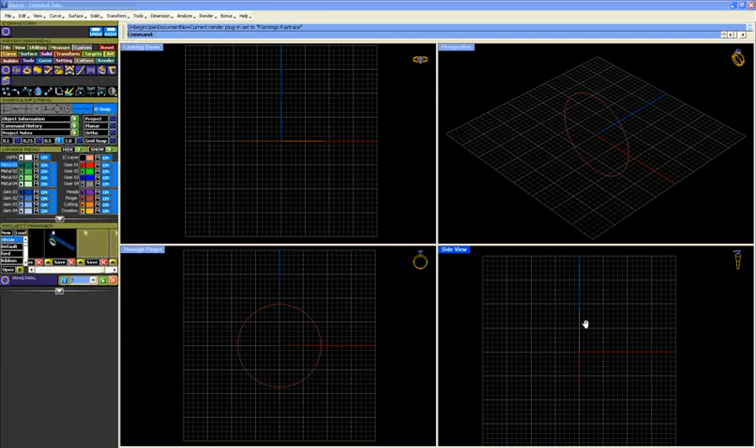I'm going to create my own profile for this, so let's go ahead and do that real quick. I'm going to go to Curve, Arc Direction. This is going to be a comfort fit, and I'm going to make a profile about like so.

Let's put that on a different layer, and then we're going to move from the midpoint to the mid of the circle. So there's that.

I'm also going to have a rounded lip here, and then a domed top to the ring as well. So let's go ahead, and I'm going to go away from this just a little bit and come up, and I'm going to look at the angle of this curve and kind of match my angle to that as close as I can get.

And let's go ahead and use blend from here to here. Okay, that's a little off, so let's move it down. And I always do this just so that there's no hard edge there.

And now let's go ahead and do another dome out like so. And I'm going to move this up out of the way, and I'm going to go ahead and mirror this to the other side. And let's join that up.

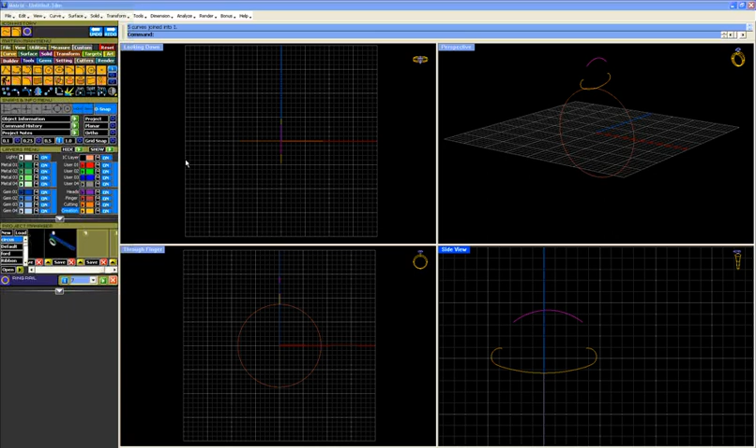And now I'm going to go ahead and move this to the center and then up. And let's 1D scale that out a little bit. The reason I'm not making that match is because to get a neater edge there, I want to use blend once again.

And let's go blend from here to here and from here to here. Now this is going to be one profile, and this one is going to be another profile.

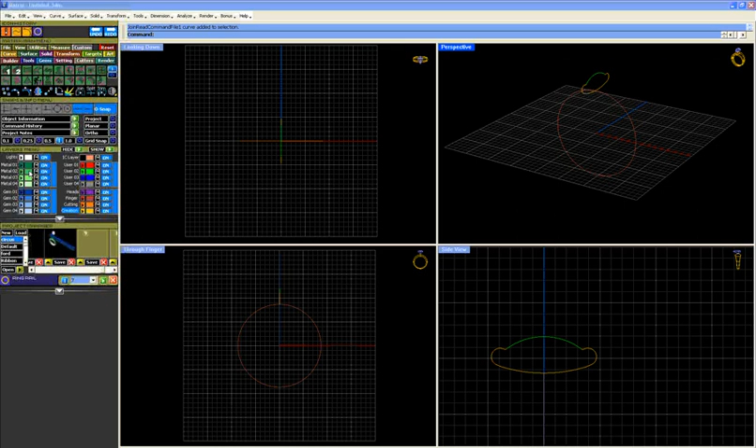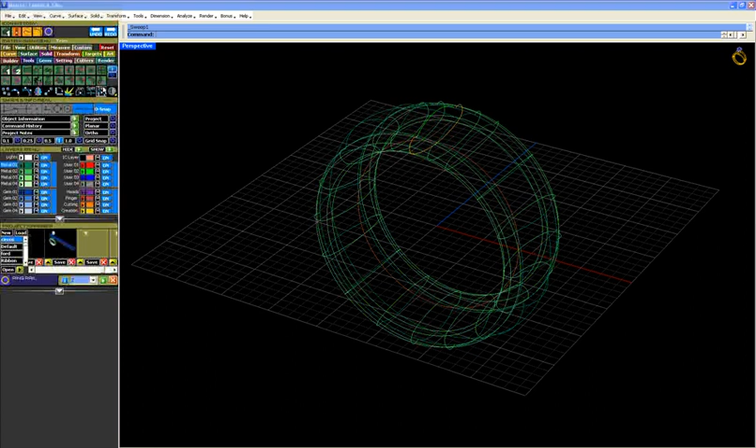So now we will go ahead and sweep one like so, and let's switch layers and do sweep one again. And there's our shank.

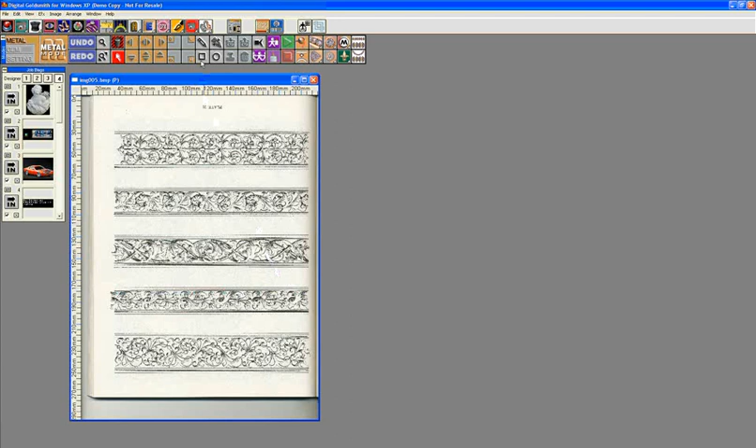Okay, now let's go over and prep our image that we're going to use as the floral pattern on our band. I'm going to head over to good old Digital Goldsmith over here. Now here's a scan that I took out of a book that just has a bunch of Victorian style art, just plates of that, and the one that I chose happens to be right here.

So we'll go ahead and hit edit crop on that. There's the pattern, and it's a pretty good scan. You can use the scan as you see it. If you want some of this gray, the more gray tones there are in the picture, the more varying heights that you'll get.

For what I really wanted, this pattern to just come up full and flat, and so I pushed the contrast. So I came up and hit the contrast button a couple times, and then depending on which way that contrast button is going to skew the colors, I need to go ahead and lighten this up.

So I'm just going to draw a lasso here and go up and say brighten, and then I'm going to hit that a couple times, and then eventually this image, what I'm looking for - and you can do this in any program if you have Photoshop or whatever - but here you can see the difference between what's truly white and what isn't. And if we come over to the color picker,

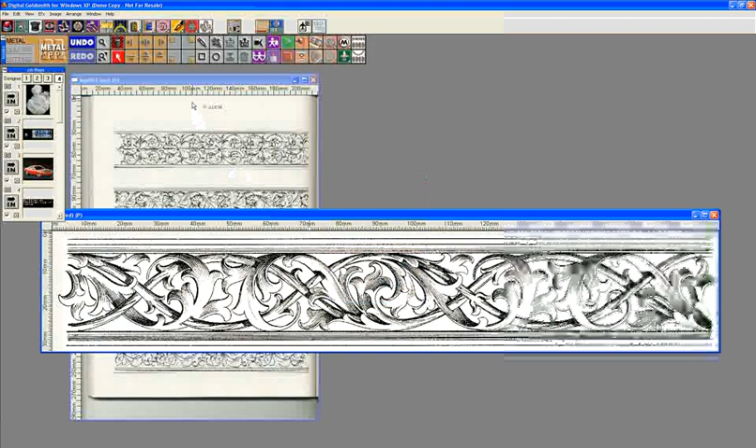255 of course is pure white, which is falling within everywhere I click here, and if we have true black, 000. So there I push the contrast to that image way up, and then I'm also going to crop this image like so.

So let's go ahead and get rid of this one. Now, on this one, I'm going to go ahead and close this one too, free up some memory here. If you look at this item, there's a repeat right here and right here.

So that's all I'm really interested in working with, and so I'm just going to kind of ballpark this, and there you go. So now we're going to say edit crop again, and there's my image that I'm going to be working with.

Now, the way that the matrix art works is that dark colors stay down and bright colors, or white, come up. And since I've pushed this, I'm obviously going to have a very low level and a very high level to the image. The problem is that I want just the pattern to show, because I want to put a texture back in this background.

Well, I can't just tell this white to stay and this white to go away. So really, to prep this image, we have one of two choices. We can trace the image in Matrix and go around the bitmap, or we can prep it in the bitmap state. So what I chose to do on this one was to simply trace this thing.

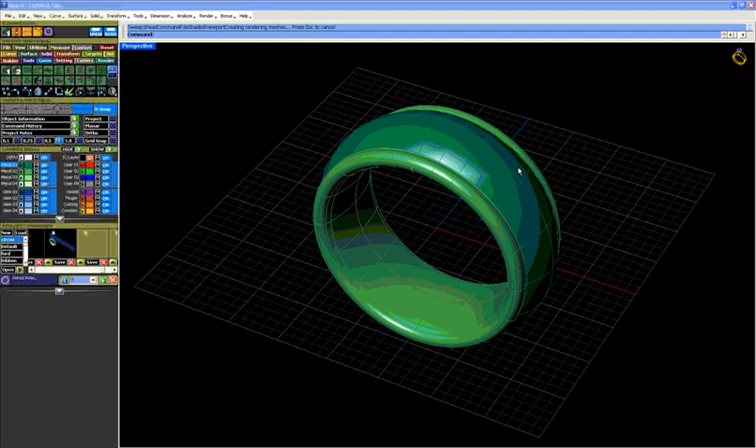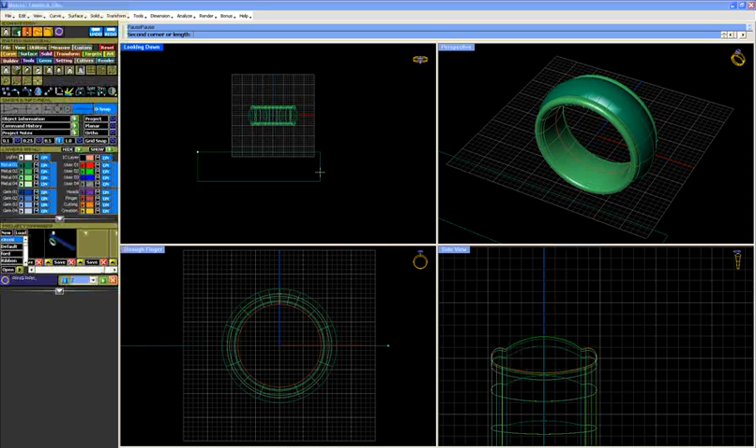So let's head back over to Matrix, and we'll lay out the groundwork for what's going to go on here. In order to get the right aspect ratio for the bitmap, I'm going to go to View and Place Background Bitmap, and I'll click on Floral Design and open that image. The reason I do that is so I know exactly what the length and width of that image is, because this part of the program locks to its aspect ratio. So let's go ahead and do that.

Next I'm going to draw a curve, and it's important to know that Matrix Art works from the bottom layer up, and then it starts again and goes up. So this is the highest layer and this is the lowest layer. I'm going to start on the lowest layer, get curve, rectangle, and basically just look at this image and draw very close to what that aspect is.

As you can see, I cropped my image right down to the edge, which makes it much easier to work in this builder because I don't have a bunch of black space out here with a poorly cropped image. So you really want to crop your image right down to the edge of the bitmap.

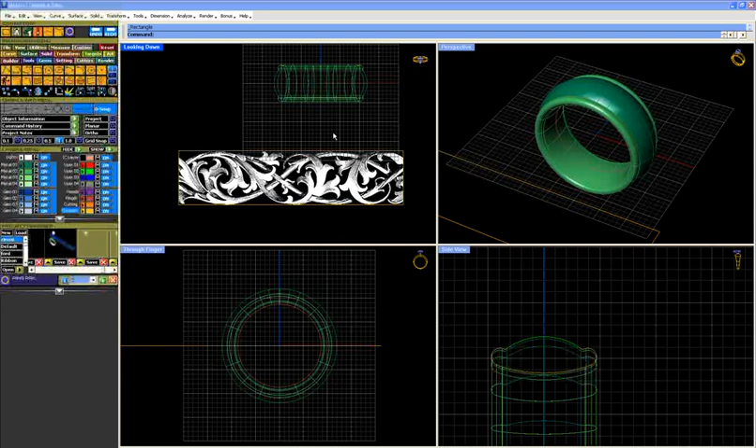Okay, with that done, let's go to Matrix Art, and we'll take this curve and put it in the curves box. Whenever you apply a bitmap, you always have to have a curve for the bitmap to be applied to. You can't just say I want to build a surface from a bitmap.

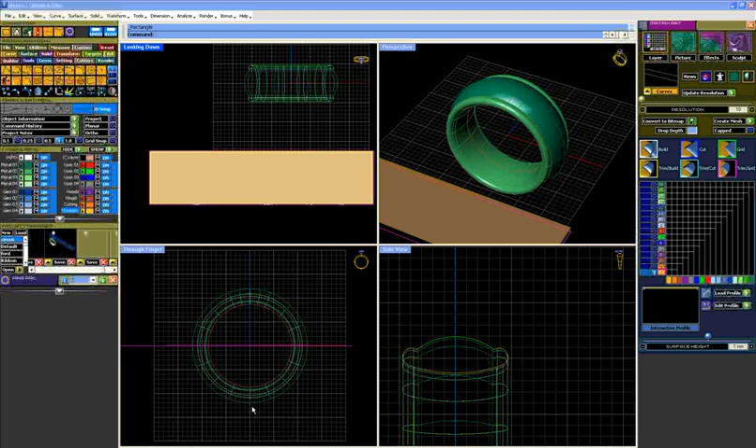Next we're going to load a flat profile, because I don't want any dome or different shape to this core floral pattern. So you can see I loaded the flat profile, and here's the thickness. I'm actually going to take this down to nothing—0.04 is as close to nothing as I'm going to get.

I'm also going to raise the resolution up, and I'll just go to a medium resolution here, and then once I like what I see, I can always crank the resolution up higher. Sometimes you actually get a better result with a lower resolution, so you want to be careful—if you crank this thing, you're going to make a mesh that is just overbearing.

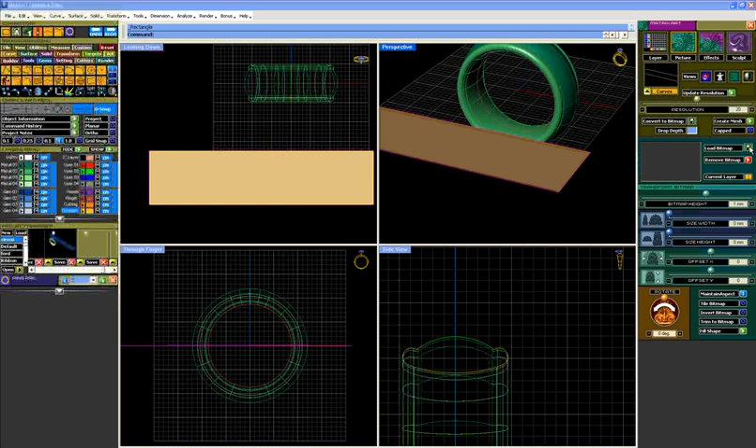Okay, let's go to picture, and let's load that bitmap. And that was called Floral Design. So we'll open that.

And it'll take it a minute, if it's a large bitmap like that one, to actually start to see it. So boom, there it is.

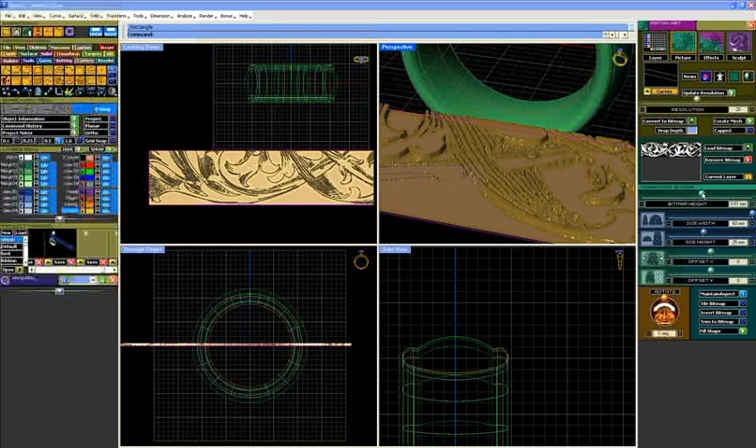So far so good. Right now what we need to do is make this thing the height that we want. Let's go ahead and go down to, I guess, somewhere in about the 0.5 millimeter range or so is probably fine. Maybe we'll go up to that.

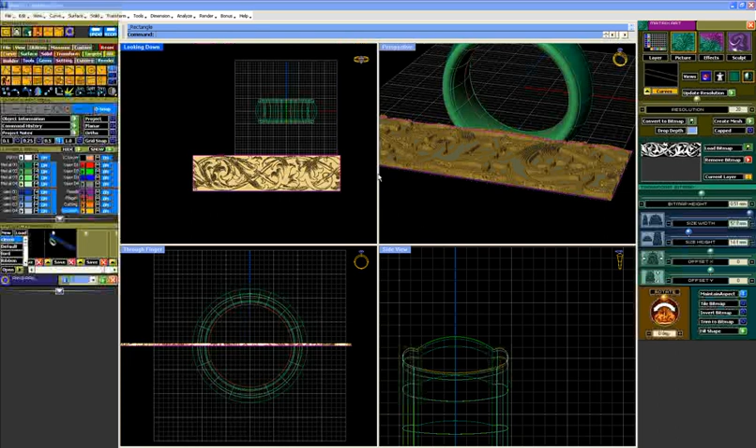You can of course type that in if you want. So there's a 0.5 millimeter high, but as you can see over here, it's not fitting very well. So with maintain aspect on, I'm just going to go ahead and click on fill shape, and that will make this thing automatically go in and match. That's why it's so important that we wanted to match the aspect ratio of the curve to the bitmap, so that when we hit fill shape, we'll get a true fill of that shape.

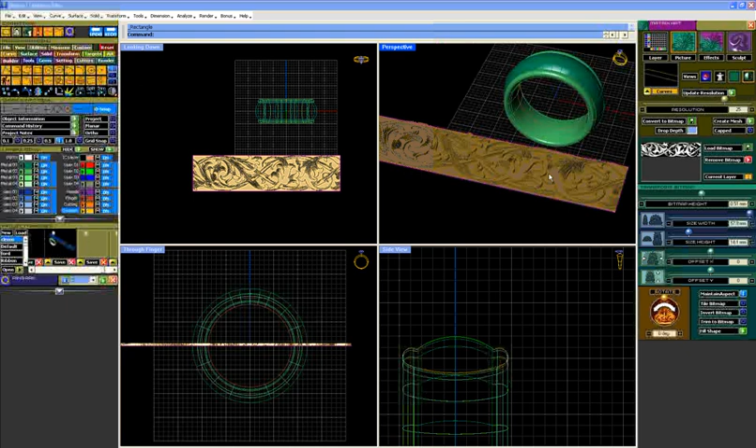Okay, now that I like that, let's go ahead and I'm going to go up to about 25 and hit update resolution. And there you go. So now you can see that we have very sharp lines.

Let me show you another tool that's very effective here. You can see that we have some noise in here, and we can control that over here in the effects menu. The first thing that we can do is we can somewhat blur the image if we want, to try to cut down on some of this.

So here's a low blur, a medium, and a high blur. It's just blurring the image and softening it. You can decide what you like there. Perhaps a low is good.

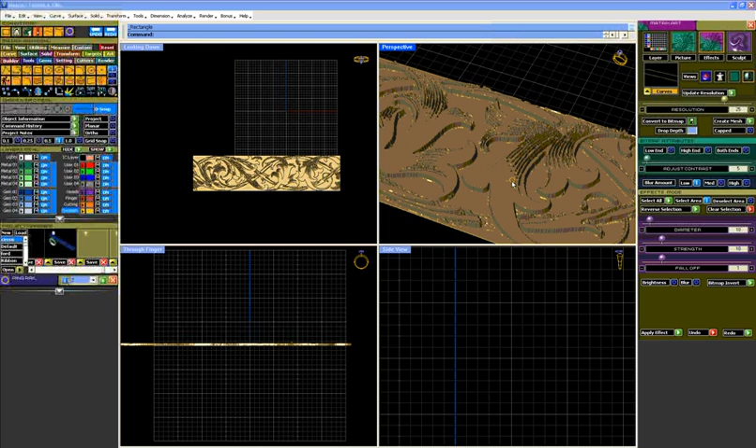And then we can adjust the contrast of the image being used. What that does is it can bring the bottom up, and it can take the top down. The more we average the pixels of the image, the more we'll get rid of some of this noise. So let's go ahead and adjust the low end and pull the slider up, and if you watch, especially right down in here, you'll see those start to go away.

You know, you can decide. I'm going to put a big texture behind this, so I'm not too awful concerned about that.

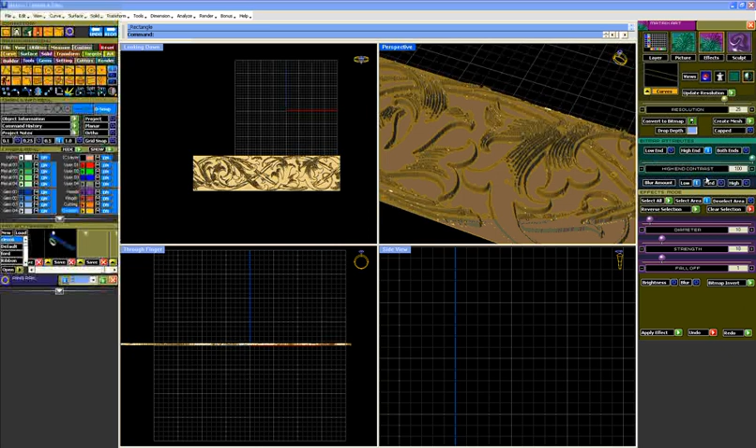And then of course you can do the high end, and you can take that contrast down. You can start to get rid of some of those high spots too, and you can see my machine's really starting to chug now with the display.

Okay, the other thing that I want to do is, because we put this on black, we can get rid of this surface here. So if I come back over here to picture, I can come down here to trim to bitmap, and what that does is that says, hey, if this is pure black, I can trim it out and not have a surface there.

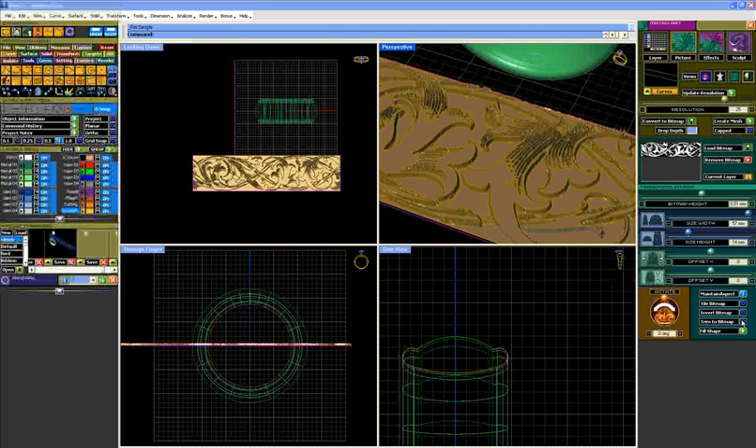So if we say trim to bitmap on, boom, there goes anything that was on pure black the way that we traced it. That way when we generate the mesh, we'll have holes in it. One neat effect would be, of course, to get rid of the shank beneath this, and then you'd have a pierced out look very easily.

Okay, once you're happy with all the settings and height and any blending or anything that you did, you want to go ahead and hit Create Mesh, and we'll go ahead and do that. There we go. And I'm immediately going to put this on a different layer color, and there we go.

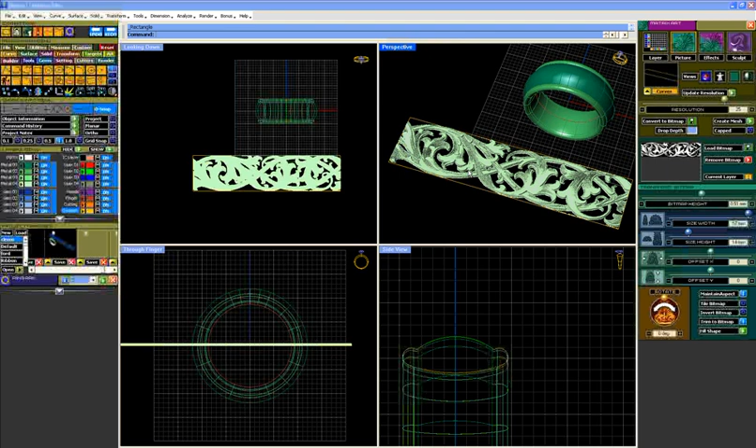Now, in order to put this pattern onto the ring, I actually wanted to repeat the pattern so that it's a smaller pattern. I don't want just this going around the whole ring, although you certainly could.

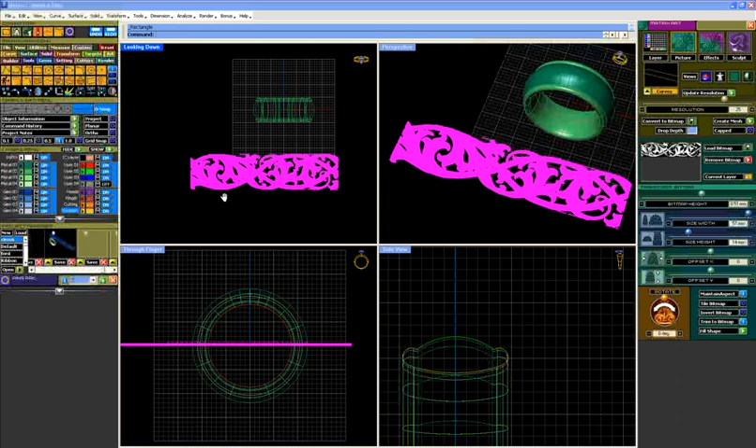Having said that, let's go ahead and take that off this layer and hide it. I'm going to go ahead and just move this thing over, and you can see just how big this thing is and how my redraw is going.

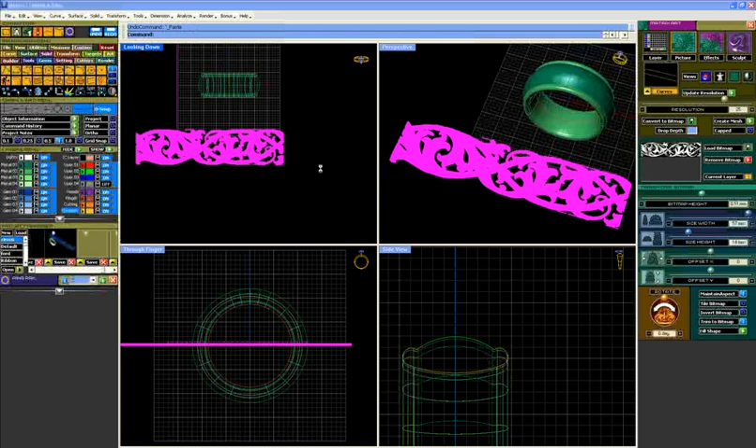Now what I did there is I inadvertently forgot to press the Alt key to get a copy of that. So here's a little trick for you. If I hit Control C now and copy that to the clipboard, now I can hit undo and undo the move, and then I can hit Control V and paste and kind of go back in time there.

So now let's go ahead and shade the looking down, and let's match this up. So now we can simply click on the mesh and move this thing over. Oops, got a little aggressive there, although it's not bad.

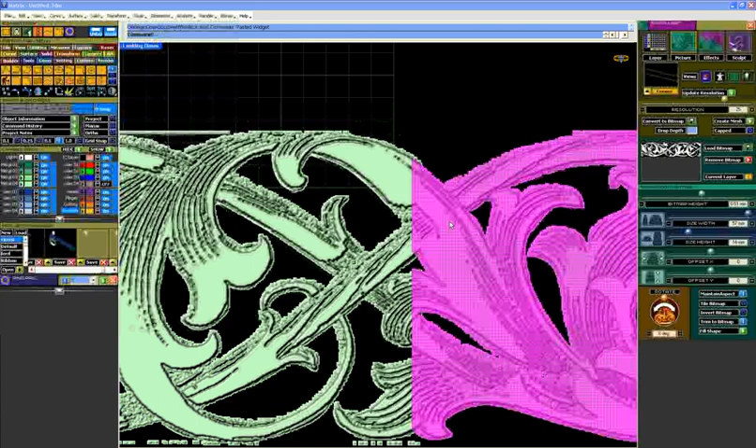So I'm just trying to get rid of the step as best I can, but okay, we'll call that good enough for today. And so there's my pattern.

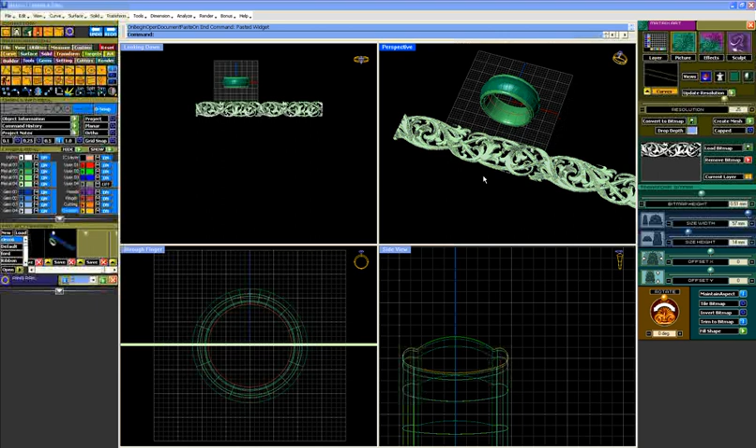The next thing that we're going to do is we're going to use the command Apply Mesh UVN to put this pattern up on the ring. So let's go ahead and select this pattern, and you have a 50-50 chance of this thing going on the outside of the band or the inside of the band.

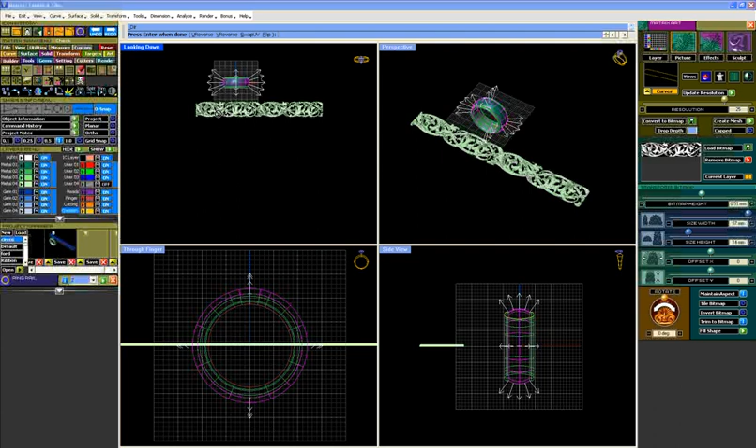One way that we can check for this is to go to Utilities and Directions, and I have found that it doesn't always go on correct. Generally you want the direction normals to point out like they are in this example. If they were pointing in, you'd just left click on the surface and you can toggle those back and forth. I'm just left clicking, but it still might put it on the inside. I haven't found the magic way to make this thing do it the same way every time, so I'll show you what I do if it does it wrong.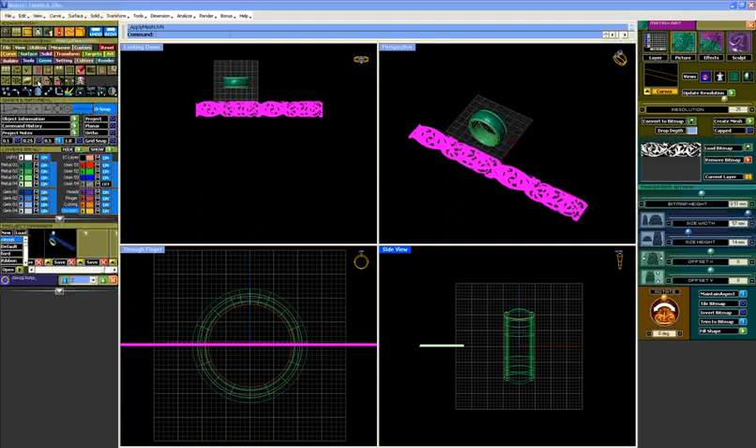I'm going to go ahead and select the pattern. I'm going to go to Utilities, and right here is Apply Mesh UVN. Okay, select the surface to apply the meshes to. We click on that surface, and we wait. And it did it correctly. Yay.

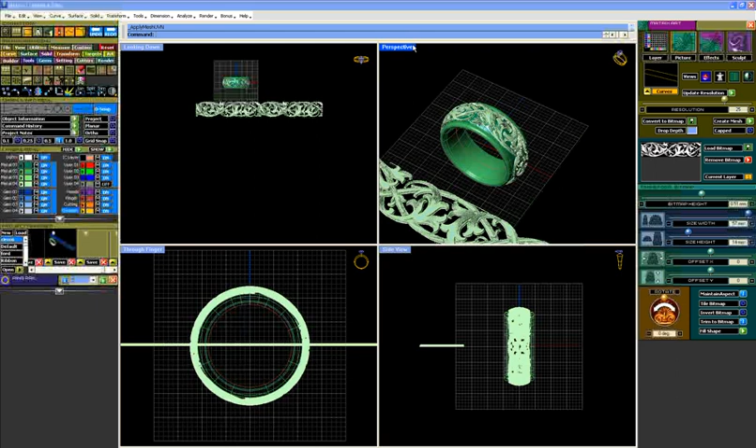Okay, now we have a gap here, and this is where it seamed the outside ends together, and there's not much we can do to control that. I would recommend just fixing it in the wax. Down here is actually the seam that we put together ourselves, and I guess it's okay in my book.

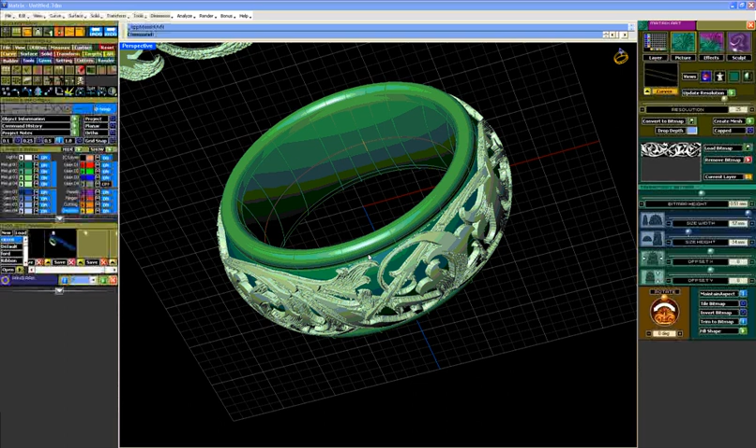If you guys want to mess with the image more, you could certainly do that. Okay, so there's that part. With that done, just to free up some memory, I'm going to go ahead and well, I'll put these in a job bag, and then I'm gonna wipe those out.

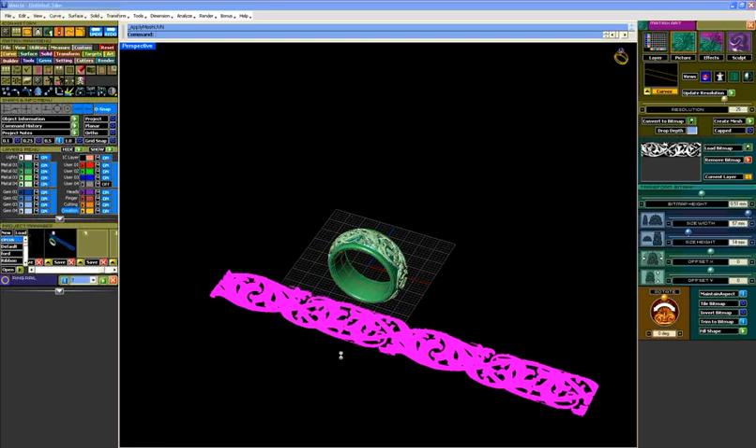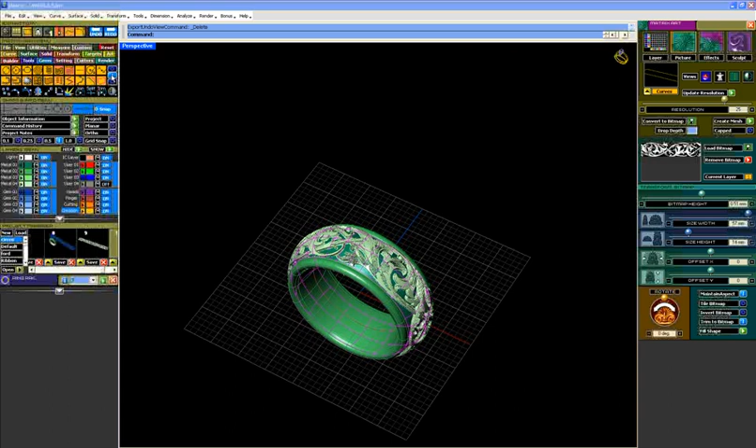Okay, now let's go ahead and put our texture back here. And to do that, we're going to kind of do the same thing that we did before, only this time, in order to get my box that's my aspect ratio, I'm simply going to go up to Curve and go down to Create UV Curves, and there is a box that is representative of that surface.

Now, in this case, so that I can control both of these textures that we're putting on the surface, I chose to do these separately. You could always do multiple curves in the same process and have the texture and the surface be built together so that they are one mesh. It's entirely up to you, but anyway, I kind of like freedom of choice here.

So now let's take this curve and put it in the box. Okay, then we'll go back to the layer and we'll make sure that our height is set low, which it is. And let's take the resolution down for a moment and we'll hit update resolution.

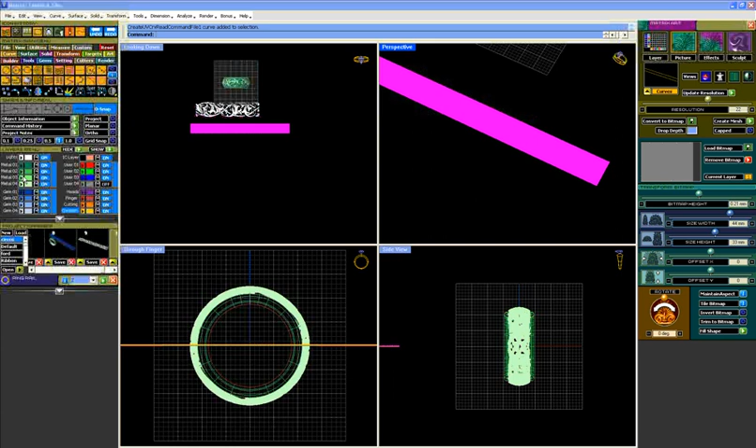And let's put this on another metal layer like so. Then we click on the mesh, go over to Utilities, Apply Mesh UVN, click on that, and we wait. There we go. Yeah, my texture could be a little finer maybe, I don't know.

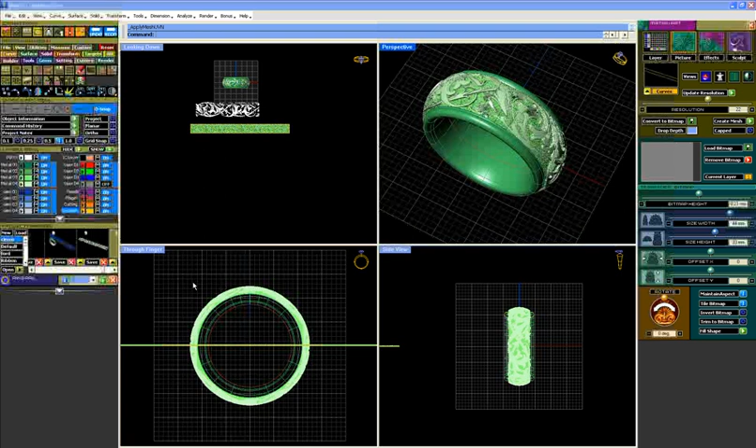This seam is just agitating me, so I'm going to go ahead and rotate my ring 90 degrees here. So we'll go F4, type 90.

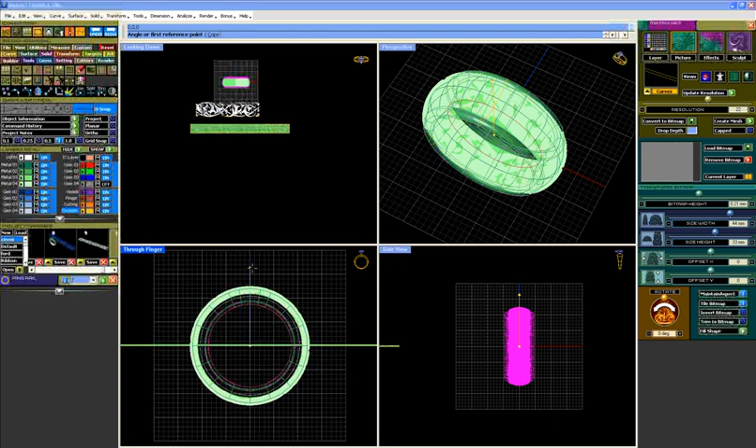Okay, there's the rotation 90 degrees, and we're looking at the ring over on this side, and you can see we have a nice texture here. We have our pattern.

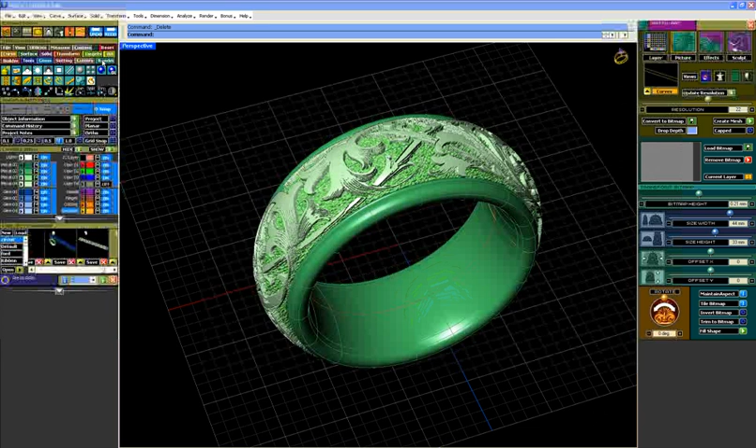Just for fun, I thought we'd go ahead and I'd show you kind of what I've been doing for rendering lately. I've been using the render style builder, and first thing I do is pick the metal. I usually use this yellow medium, and I still like the less specular family of shaders, but you're welcome to try. Here's a new one, highly polished.

A lot of people like that one. So let's go ahead and right click all my metal colors here, and we'll go ahead and assign those colors to that. Don't have any gems to worry about.

Under the style, I really enjoy this dark environment gray right here, or here's a bit of a darker one. This one's nice. One's reflective and one isn't. Tell you the truth, I can't remember which one's which.

Let's go ahead and hit calculate for the ground plane, and I'll go ahead and hit render.

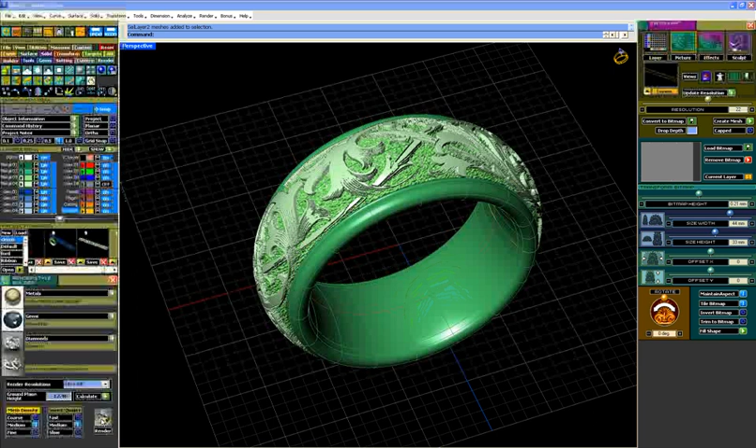Okay, and through the magic of hitting the pause key, my render is done. Or perhaps I should tell you my machine is that fast. Anyway, here's a render of this item, and it looks pretty good, although to me this is getting a bit bright. We're starting to lose detail because of the highlight.

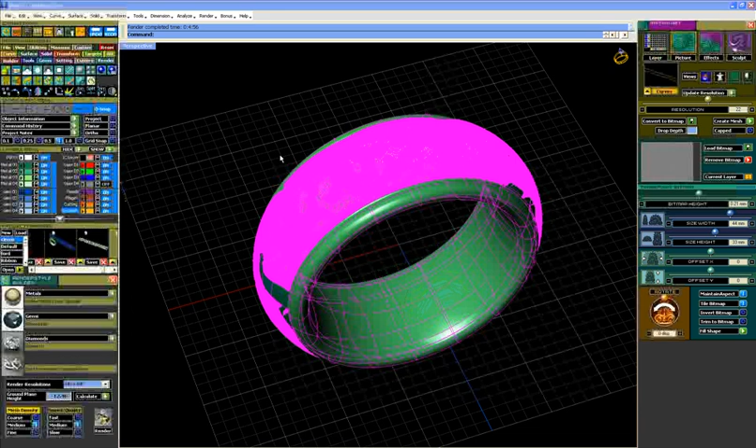So I'm going to go ahead and close that. Now here's a little trick that you can do in this builder. About the time you learn this, we will have changed the way it works.

We're getting ready to do a patch, and in the patch we're going to change how this menu works because it's kind of cumbersome. What happens is that if you make any changes here in any of these, when you hit render, we have to load each thing that you add in, including this environment. That means we have to take this model out of the scene, load a new scene with these lights and the colors that go with that scene, and then we have to regenerate the mesh and render.

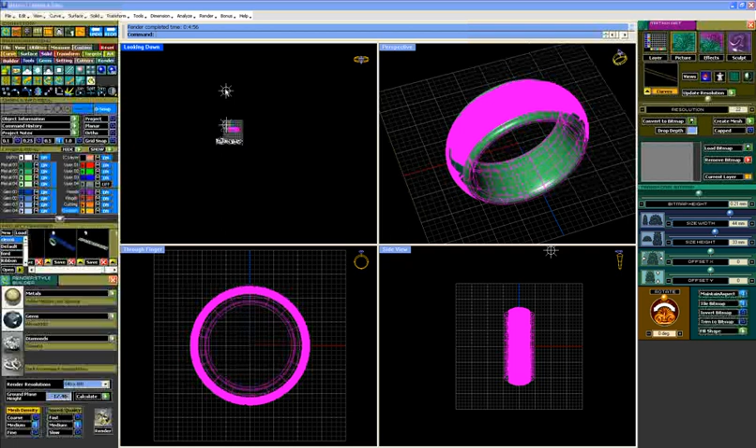Well, the drag of that is that if I go ahead and move one of these lights, but then hit render, it's going to load the old scene and the light will be back over here. We're going to take care of that in the next patch, like I say.

For now, though, I'm going to move these lights over closer to where we're viewing the object from. Sorry, if you look over here, I'm on the back side of the object, so we're actually standing over here. And then I'm going to hit Control T, which is Properties, or you could go Edit, Object Properties, either one. And then I go not to the object, but to the light.

And I'm just going to take the 20 down to about 12. And then this one is much brighter, and I'm going to take it down to about 10. This will be my focal light now. And so I kind of just put those there.

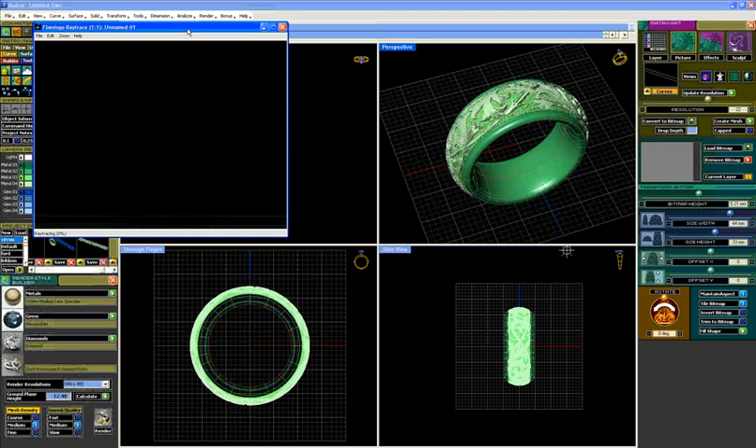And then here's the trick. Again, don't hit render or you'll lose what you just did. You just click in the viewport and hit Control R for render. And as you can see, up comes the next render window. And it didn't load anything else because I didn't need it to.

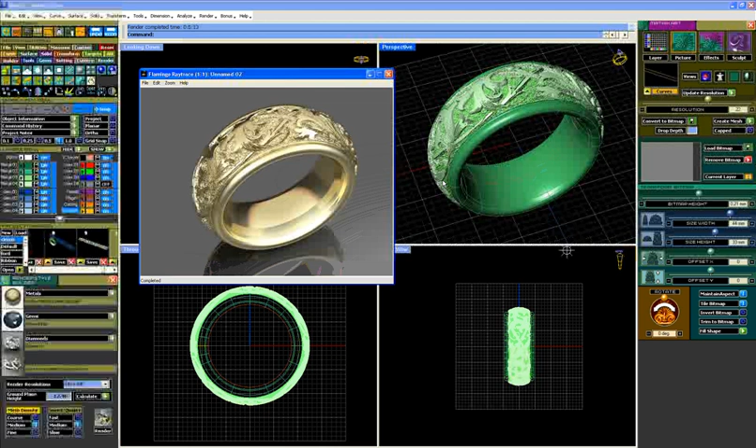Okay, and here's the finished render. Still a little bit bright here. Could probably tone down one of the lights a little bit, but I would say all in all, not too bad. So that's how you use Matrix Art to make a ring like that. Thanks for watching.